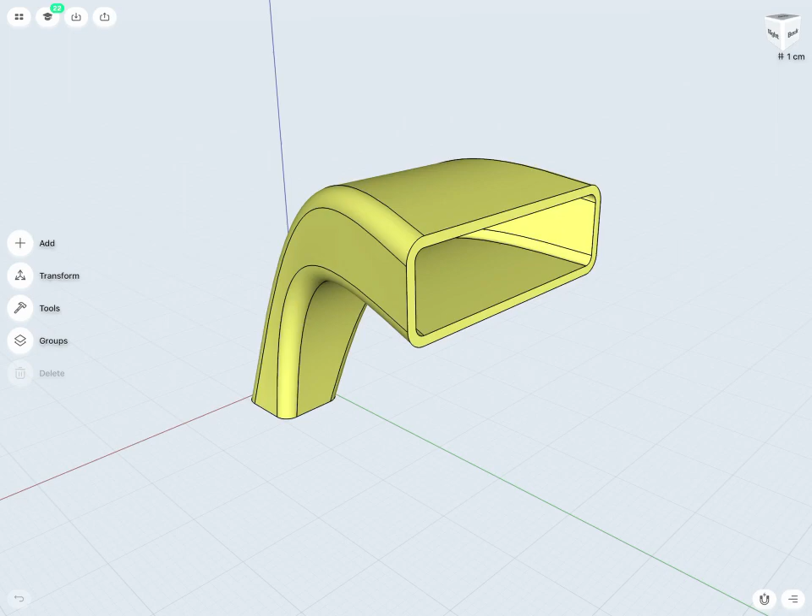The shell tool is used to hollow out objects such as this, and also to create thin-walled bodies and uniform thin-walled bodies.

For example, if I take a look at this blower here, we can see that the wall thickness about this entire body or design is uniform, and this was actually set to be 1 centimeter wall thickness.

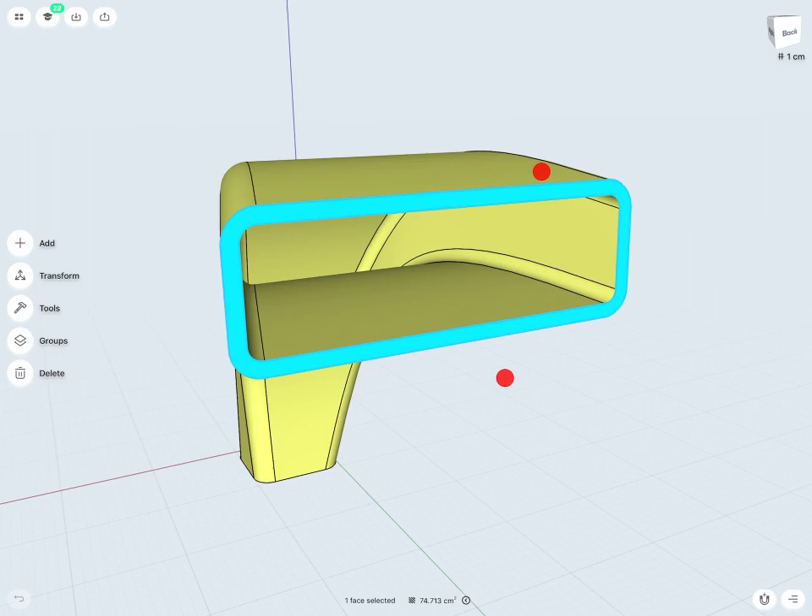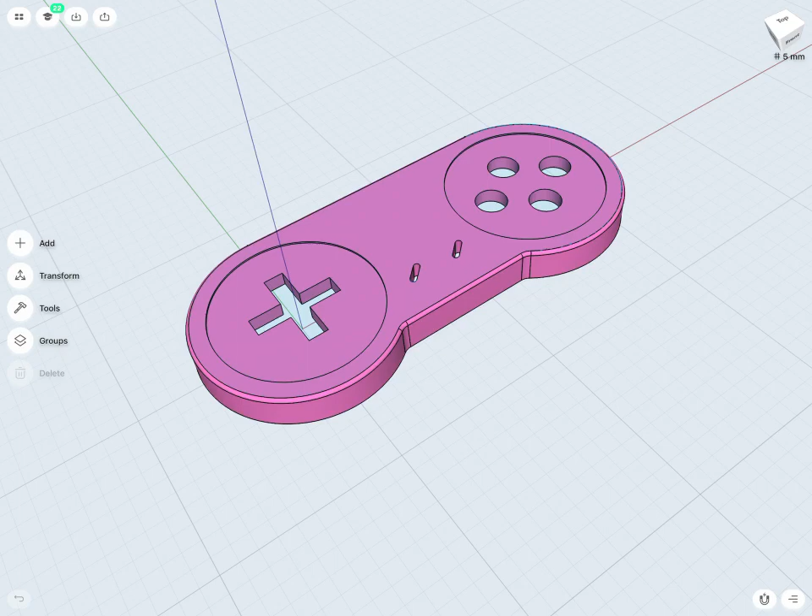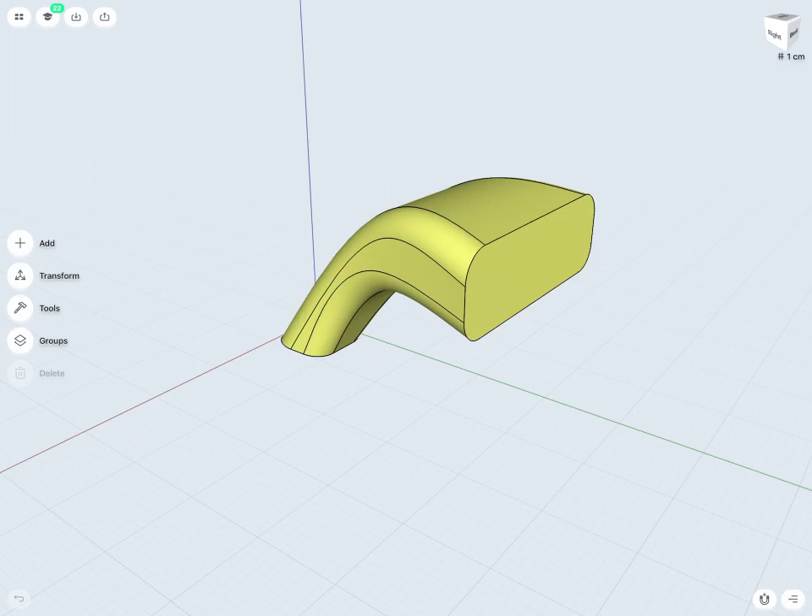Starting with my initial blower example here, the shell tool is very simple to use. Just go into Tools, find my shell tool, and then I can start by selecting whichever faces I'd like to remove. In this case it would be this face here as well as my bottom face of my blower. Once I'm happy with my selections I can tap Next, and then set the thickness or wall thickness I'd like for the remainder of my design.

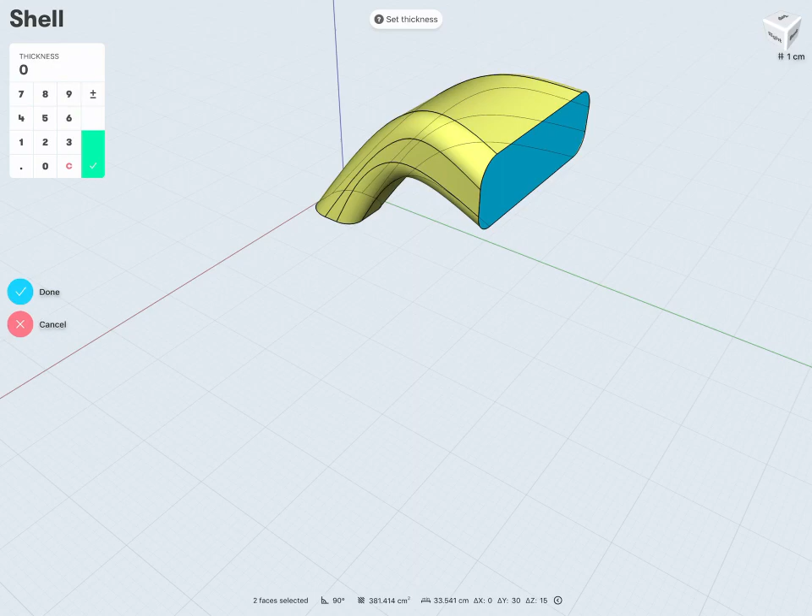In this case I'm going to throw in a 1 centimeter thickness. Tap the green check once I'm happy. And see, that's been applied, and you can make changes after the fact.

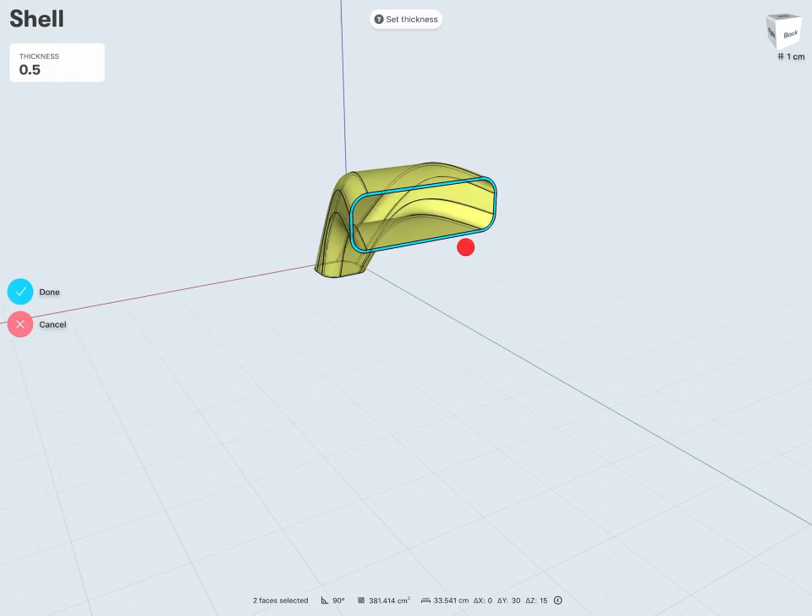So if you're happy with this, you can tap Done, or you can change this value to maybe now 0.5 thickness. You can see this automatically being previewed here, and once we're happy with it, I can tap my Done checkmark.

Very similarly, I have my mug design here. This was just created with a simple revolve, and now I'd like to hollow it out. So again, I go into Tools, Shell, select the face I'd like to remove, so this top face in this case, tap Next, and give it whatever thickness I may want.

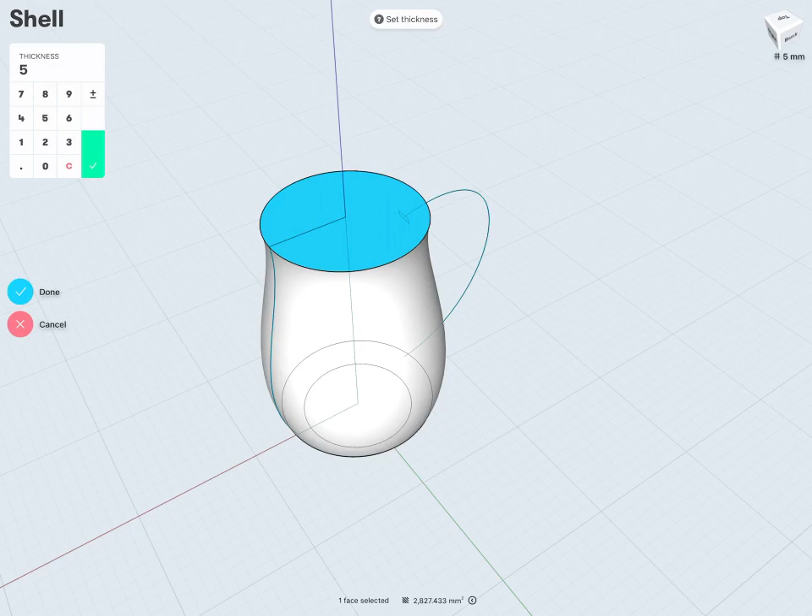In this case, maybe 5 millimeters. Tap the green check, take a look, see if I'm happy with that. A little too thick for my liking, so I'll change the thickness to maybe 3 millimeters, 2 millimeters, whatever I may be happy with for my mug thickness here.

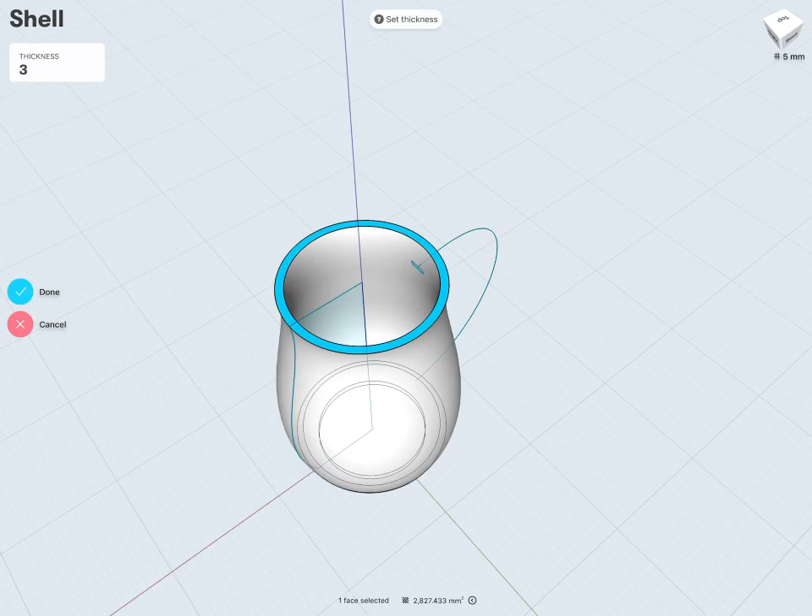Once I'm happy, tap the Done check to finish it off. Now we can see my mug is nice and hollowed out.

The shell command is also very useful for any plastics designs. One of our manufacturing requirements for plastics designs, and to be a good injection mold component, is to do our best to maintain uniform wall thickness across our entire design. So we can do this by using the shell very easily.

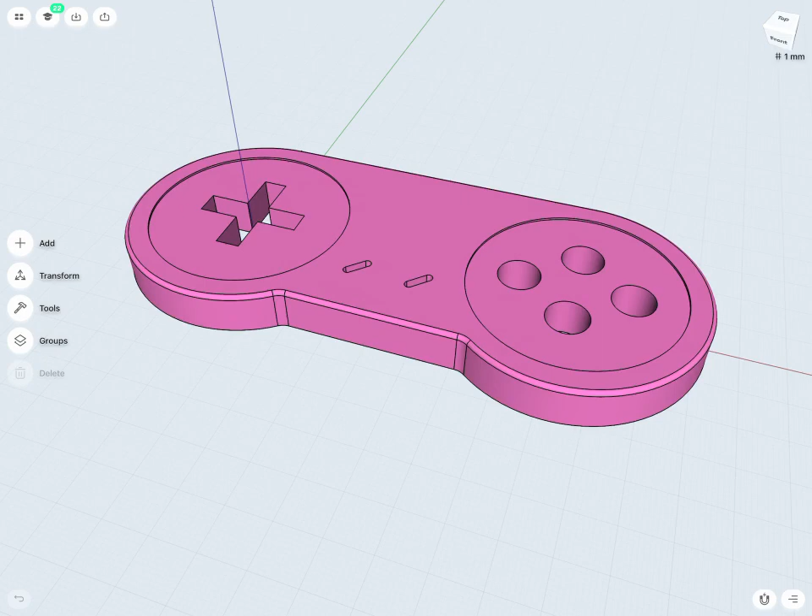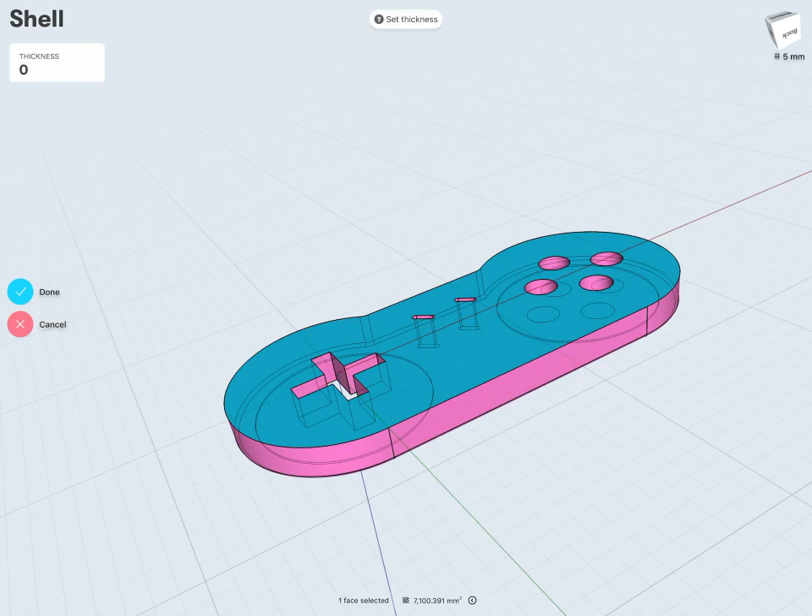In this example, I have this remote control that I've designed here, and what I'd like to do is probably just shell out the back, as we'd need some electronics and so on to go in our actual enclosure here. So I can go into Tools, Shell, and select whichever faces I'd like to remove, in this case my back face here, and tap Next, and then set whatever wall thickness I may like.

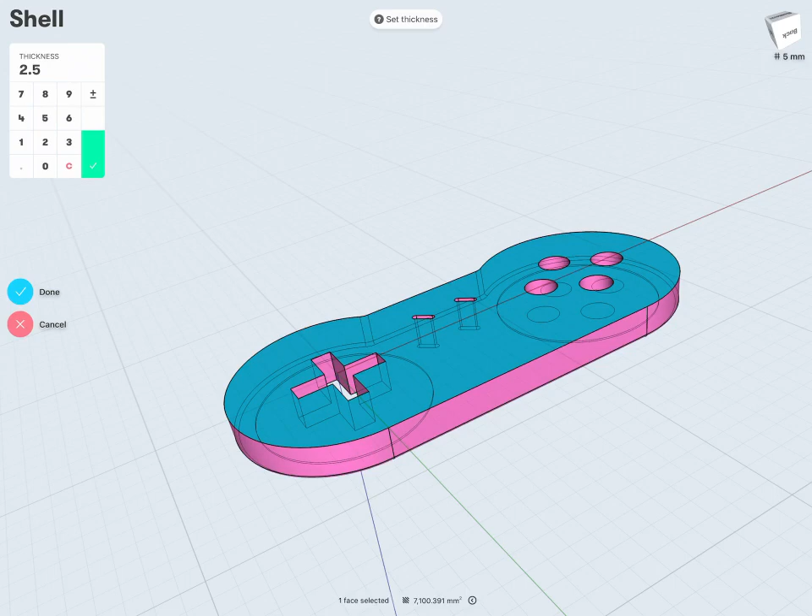Standard wall thicknesses will change depending on your exact designs and manufacturing requirements. However, maybe something between 2 to 4 millimeters is commonly used in industry. Let's throw in maybe 2.5 millimeters and tap the green check. Let's take a look how that may look.

Maybe you want to change it slightly depending on our designs. And again, these will most likely be manufacturing requirements, so your manufacturer should give you a good idea on what to set your specific wall thickness values as.

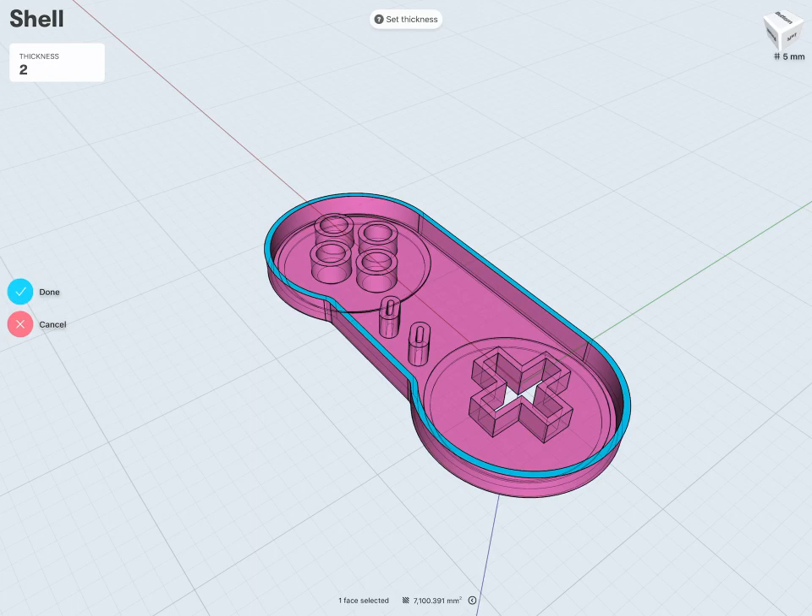Once happy with that, I just tap the Done check. And now you can see a nice shelled out component here, that should be able to now be easier manufactured by, say, injection molding this plastics design.

In the next few lessons, we'll learn some more additional complex body design techniques.